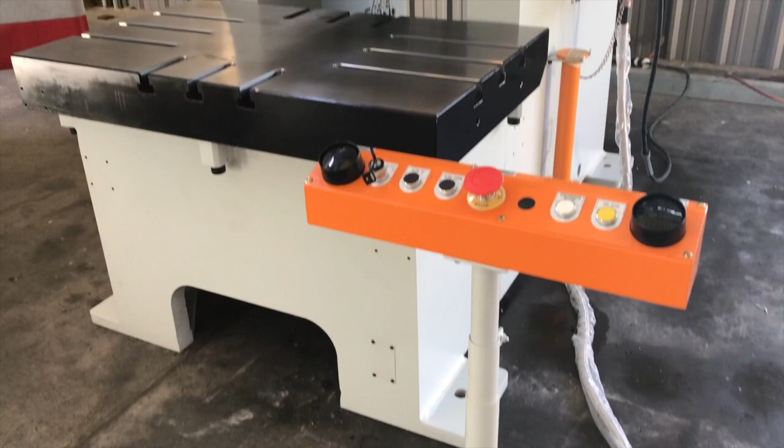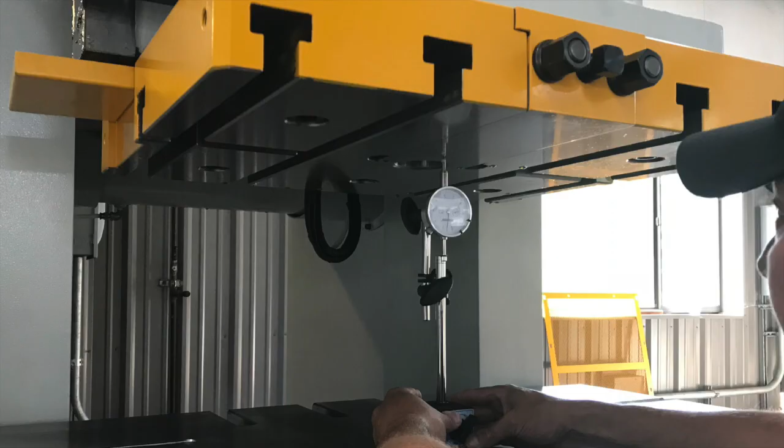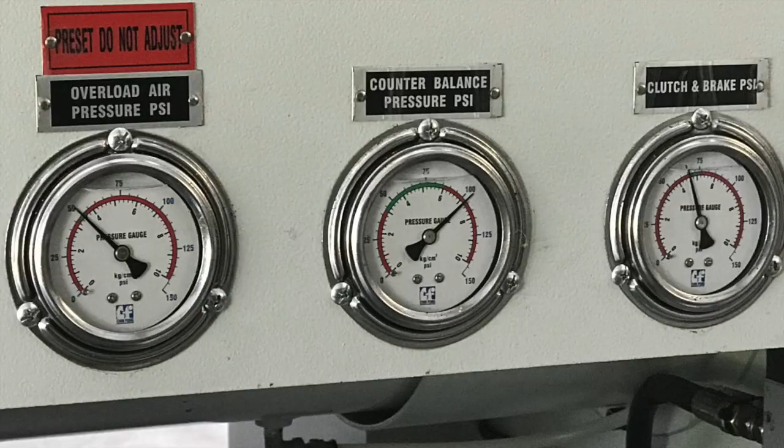Today we're going to give a couple examples of how to check clearances on a mechanical stamping press. These will include your ball cup clearance and your total or overall clearance. Most presses can use the counterbalance to obtain and tighten up all the clearances on the press sufficiently without having to use a jack.

Very first thing you need to make sure is please put the press on bottom. It gives you more working room in the slide area and makes it easier to use less attachments or measurement devices when you're measuring for your total clearance. Make sure the hydraulic overload is pumped up and or pressurized if your press has this. Very important. Do not do these checks without the hydraulic overload pumped up.

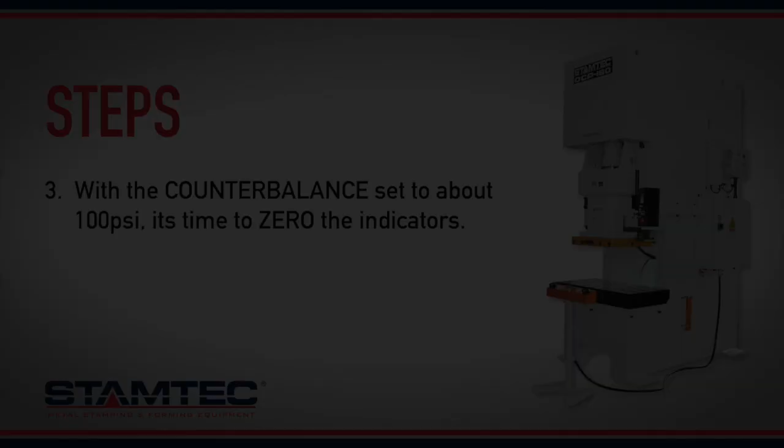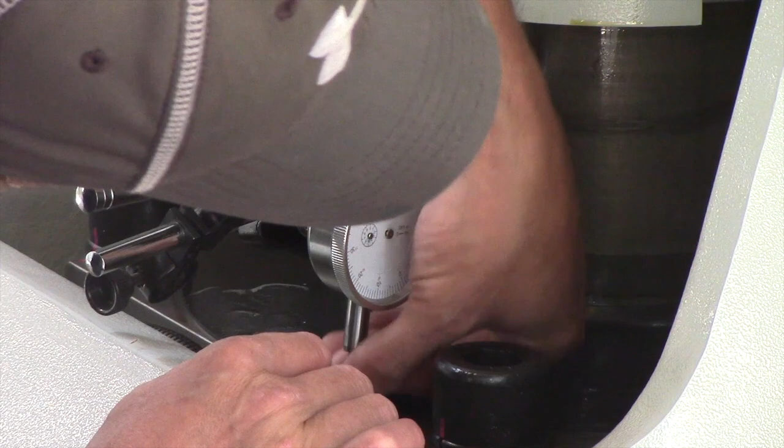Please make sure your indicators are set up to allow travel both ways. The first one is for your ball cup. It's connected to the screw and the top plate of the housing. Then we'll come down and we'll zero our bottom indicator for our total or overall clearance.

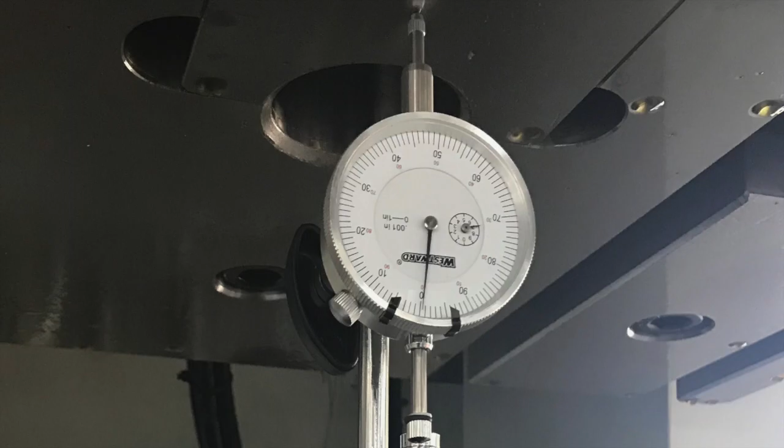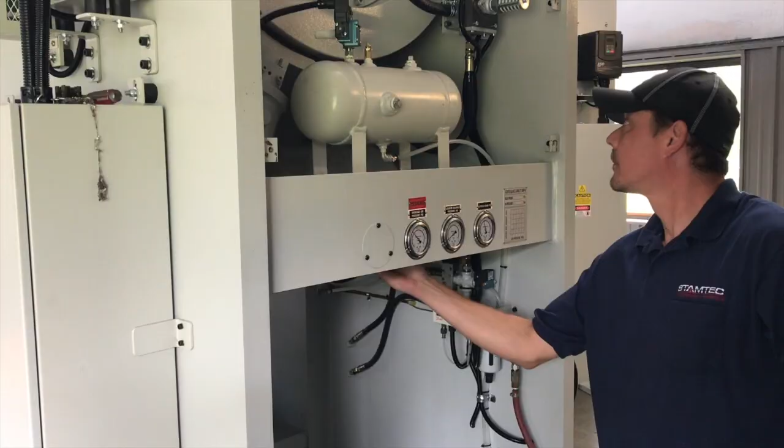You can do these one at a time, or you can do multiple. If this happens to be a 2-point press, you may want to use 2 indicators, one for each side. What we're going to do now is we're going to remove the air pressure from the counterbalance system and drain the counterbalance tank.

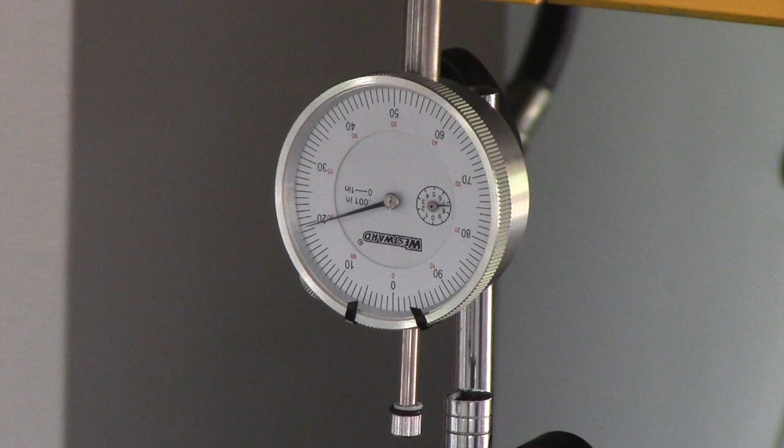Once this is done, we should have our readings on our indicator to give us the clearance that we've achieved.